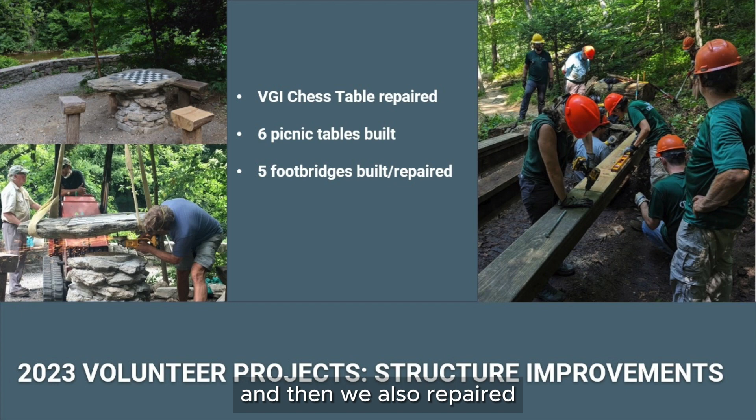Built 6 new picnic tables, 2 of which are in a new picnic area on Forbidden Drive by Jeanette Street. There's a planting there. If you haven't had a picnic, I have. You guys should go and enjoy it. It's beautiful.

And then we also repaired or completely rebuilt 5 footbridges in the park, which was no easy feat. Some of these were in the heat of summer in locations that we had to haul a lot of heavy material in. That was a partnership with our structures crew and crew leaders together.

And we also planted a whole lot, so over 1,000 native plants. About half of that are herbaceous, but among that, 246 trees, 209 shrubs.

Our 4 main areas that we focused on this year was continuing a riparian planting just north of the Red Covered Bridge next to Forbidden Drive. On the Yellow Trail uphill from Kitchens Lane, Harvey Street tract, we've been putting a lot of work. You'll hear more about that, but we've been continuing to restore the habitat in that area. And then along the fence line at Andorra Meadow, sort of building a natural screen to kind of block out some of the artificial light that has been popping up.

Engagement with our youth has always been really important to us. Since FOW's been around, we've always worked with school groups. Last year alone, we had 11 different school groups that came out to work on service projects in the park. But something that we've really been wanting to do beyond having that kind of one and done visit with students is to have returning students, recurring engagement.

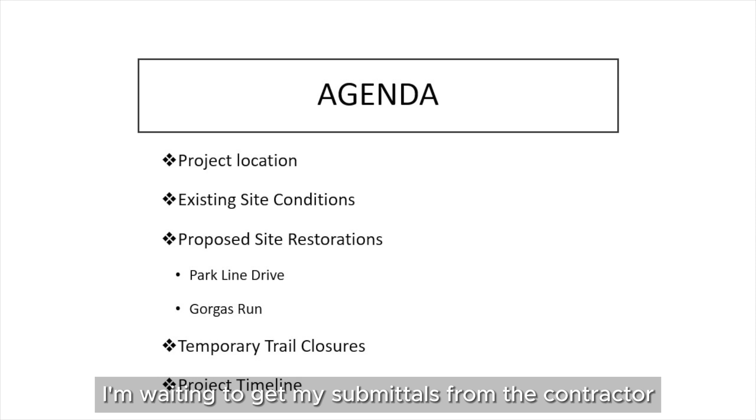So my group is an office that works on natural restoration projects, usually stream restoration and wetland restoration projects. They're usually based around where Water Department infrastructure assets are located - storm sewers, sanitary sewers, water mains, stuff like that. I'm just going to tell you guys about one project which should be getting started in the next few weeks. I'm waiting to get my submittals from the contractor. It's the Park Line Drive Interceptor and Gorgas Chute and Outfall project.

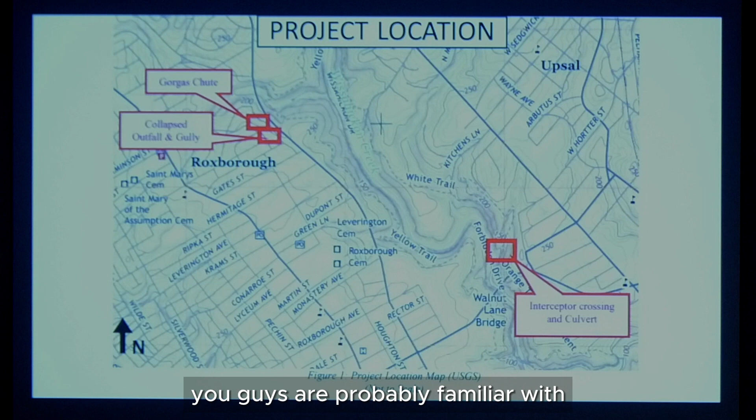Here's a map of the locations. So the Park Line Drive Interceptor crossing - you guys are probably familiar with the Toleration statue. If you take the trail down off of Park Line Drive, you'll get to a spot where there's a crossing that goes over the stream there. That's actually a sewer interceptor. There's a 5-foot diameter sanitary sewer that runs underneath that little pathway when you're walking across the stream. So that's one of the project sites.

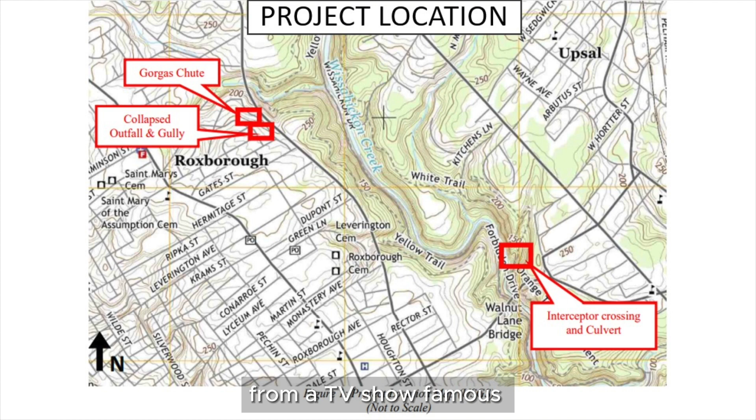I have more slides moving up, so I won't get into too much detail while we're looking at the map. The other 2 sites are located right next to each other, right off of Gorgas Lane. You come down Gorgas Lane and up the yellow trail a little bit. There's a stormwater outfall that drains a small part of Henry Avenue, and then there's another stormwater outfall that's apparently famous from a TV show - a stormwater chute. I don't know the show very well, Pauline was explaining it to me. Yeah, I've kind of heard a few things about that. So hopefully it looks familiar.

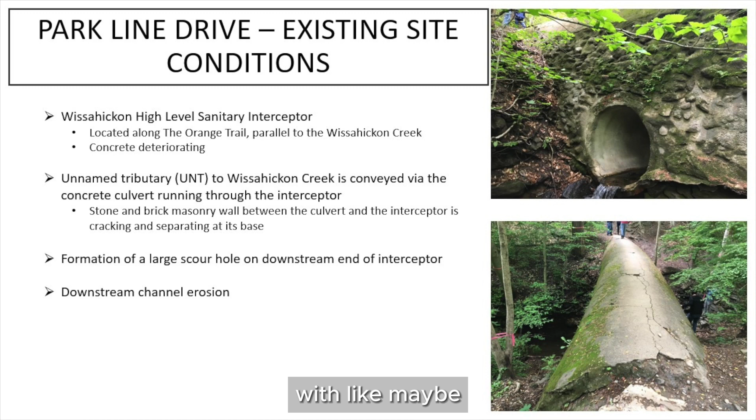But getting back into the Park Line Drive site first - this is what the infrastructure looks like right now. The pictures themselves might be a year old or so, but you can see the concrete on the interceptor crossing. It's a sanitary sewer, we call it an interceptor based on where it is and all the connecting sewers. So the trail here that goes across the top of that structure - the pipe is actually directly underneath your feet, with maybe a couple feet of concrete in between you and that, obviously.

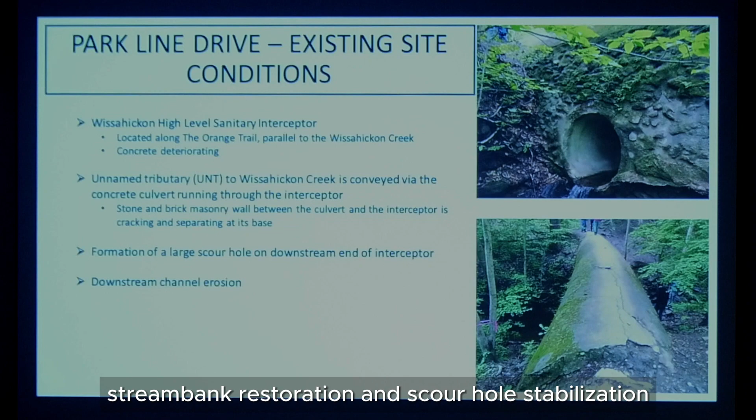In this picture, the sewer's up here, and this culvert is what allows the stream to flow through there. What you can see is that there had been some old repairs done, and the stream just continues to wear away on the stream bed below the structure. Any undermining like that isn't really good for the structure. What we're going to do is clean off the entire structure, repoint it with mortar, and then going downstream, we're looking at doing some stream bank restoration and scour hole stabilization - basically putting big rocks in the stream and augmenting that with some plantings, trees and grasses to keep everything stable. If you guys have any questions, I can answer them, or you can follow up with Pauline or Ruffian, and I can send you information.

I also have some summary sheets over here. I only brought 10, so I'm a little light on those - I didn't know there was going to be such a great crowd.

Rick, I have a question before you move on from the High Level Interceptor there - it's very difficult to walk across because it's rounded. Do we have any plans to flatten that out a little bit? No, unfortunately, no - you can't do that. It's just going to be the same thing that it is.

I'm going to show the trail diversions later too. We didn't see any need at the time - everybody's already using it, and it seems relatively safe. It doesn't seem like anybody's gotten in any trouble out there, so good on everybody for that one.

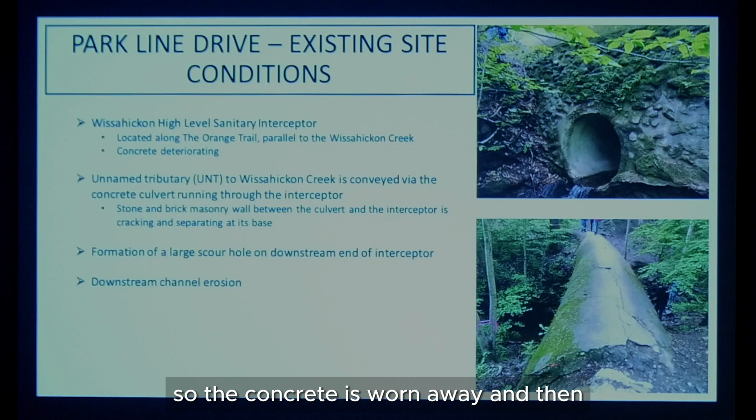So really just repairing the infrastructure - repairing all the concrete. You can see the crown of the sewer itself has become exposed, so the concrete is worn away, and then the cover wore away. Repairing the structure is the big deal there.

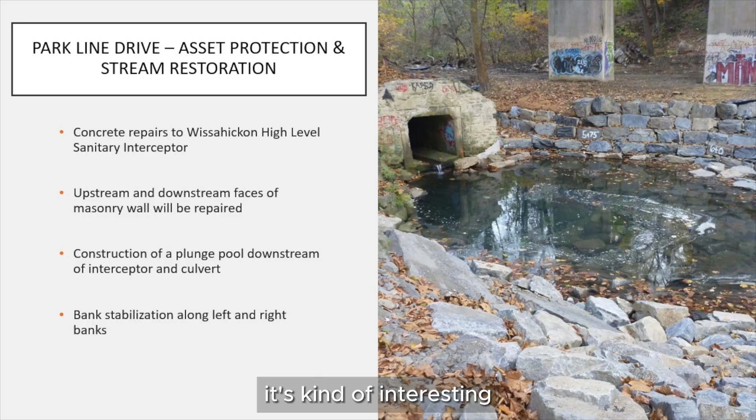Over at the Gorgas site now, this is a picture of the old scour hole in front of the outfall. That's not exactly what we're repairing here, but the big deal is the chute that stems from an outfall off of Fountain and Henry - there's actually two Henrys there, it's kind of interesting.

The chute is actually in bad shape. There's a lot of cracks and holes in it. A bunch of the segments are settling at different rates, so it's almost like shifting and morphing apart. The plan is to use a particular type of concrete to fill in all the holes and patch the whole thing up.

Then use a different kind of mortar for the grout between the segments, so it's a little more pliable and can fit in there without immediately cracking. Around the chute, we're going to do a lot of regrading and planting - we're going to try shade-tolerant plugs and grasses underneath the Henry Avenue Bridge. It'll be interesting to see how that goes, since it's pretty much barren under there right now - when you don't get a lot of light, you don't get a lot of vegetation.

So for the chute, why not replace it with basically a spreader kind of system? We had thought about doing stone steps, like stone weirs, coming down the hill. There were a couple of reasons why we didn't go with that.

Money being part of it, unfortunately, but really the biggest deal is the outfall is very high up on the hill and it's a relatively big one. When you get a lot of water flushing down the hill like this, it can easily start to tear apart structures like that.

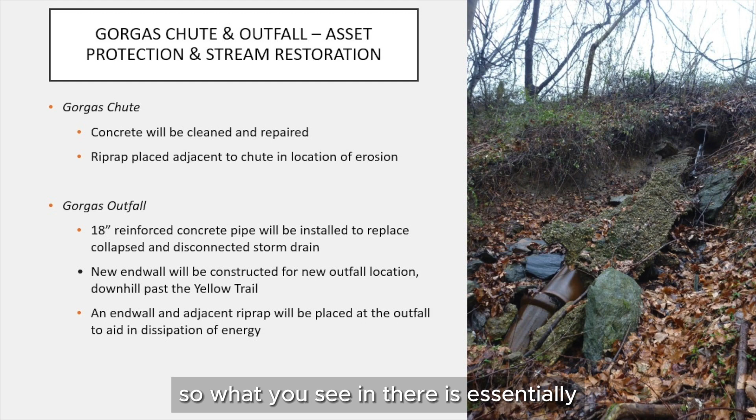This is the other site that's at Gorgas. This is the outfall off of Henry Avenue. As you can tell, what happened there is that the segments of the pipe started coming apart. As they did, the water started getting underneath them, scooping and eroding the dirt out from underneath them, and it eventually continued to collapse on itself.

So what you're seeing there is water, not immediately during a storm, but relatively close to when it had rained. Once this structure fell apart, the stormwater comes out, hits all this rock and concrete that's in the way, and completely blows out the banks and everything around it.

One of the issues with this, when we did the other project, the outfall was in decent shape, and then it actually started deteriorating during the project. We did a previous project at Gorgas and put a bunch of rock around the trail to make sure the yellow trail stayed stable with that stormwater coming down the hill.

So the plan now is to add a new manhole towards the top of the hill, and then we're going to have a series of manholes as we bring the water down through essentially a series of steps within the pipes. There'll be about 5 or 6 pipes connected to 5 manholes that bring the water down the slope and then discharge it through an outfall.

The key thing with this is getting the water off of Henry Avenue safely, not having it erode the stream and undercut trees out there. Unfortunately, a few big trees will have to come down in order for us to do this work.

But the other key is the stormwater now is going to be conveyed through this pipe underneath the yellow trail, so the trail won't be in jeopardy anymore and will be stable in perpetuity. From there, the outfall discharges onto a rock apron, and there's actually a big bedrock outcrop that it'll flow over, as it already does, down to the Gorgas Run.

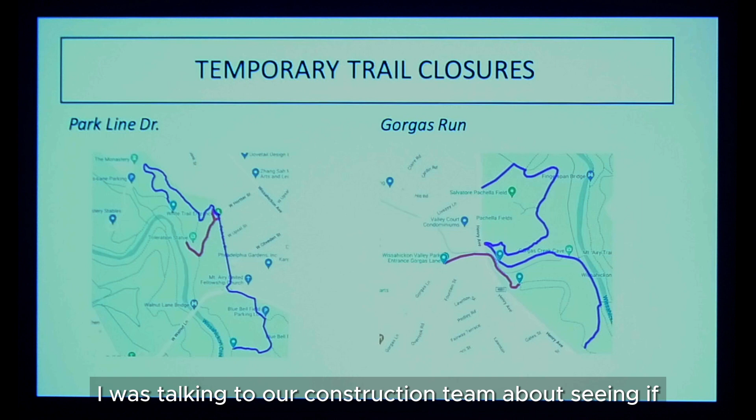I was talking to our construction team about seeing if, once we get equipment here, maybe we could do some staging and stockpiling here rather than over on the Gorgas Lane Trail. That way we could open this back up. But I can't promise that right now — I haven't spoken with the contractor, and we're still sorting everything out with the submittals.

So, I'm talking a lot, sorry. This is my stuff.

Construction is initiated — we had the pre-con meeting out in the field last week on Tuesday. Considering they don't have the submittals in yet, I'm thinking it's probably going to be more like late February when they get started.

From what I've heard from the construction team, they're going to start at the Gorgas site first, even though I started at the Parkline site, which is just the way I've been doing that mentally for 3 years. They'll start at Gorgas and then move on to Parkline. The contractor who won the bid actually did the Gorgas site previously, so they're very familiar with the site and the interaction of trail patrons there. I think that should work out well, and I'm really looking forward to it getting started.

The construction stuff in the field is kind of my favorite thing to be involved in. So, thank you.

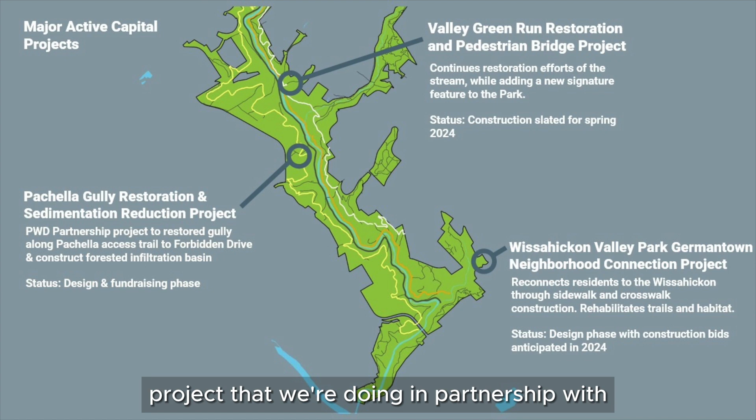So these are the 3 projects we'll be diving into with you. Starting with the Wissahickon Valley Park Germantown Neighborhood Connection project, I'll provide some updates, as well as introducing our Pachella Gully project that we're doing in partnership with the Water Department. Then I'll turn it over to Ruffian to provide updates about the Valley Green Run project.

But before that, I wanted to share the exciting new kiosks that went into the park last year. This is part of our wayfinding and signage plan implemented in 2016, which saw the installation of over 25 kiosks throughout the park, as well as wayfinding posts, providing a formal way for visitors to interact with and understand how they get around the park. The tertiary, or single panel, kiosks you see here had been identified in the plan to be installed, and as funding became available last year, we were able to put them in.

That includes Cathedral Road, which is by Courtesy Stable, Sumac Street down in the southern end of the park, as well as Harvey Street, which is in connection with our capital project there, and then Rittenhouse Street across the street from Saylor Grove.

I also have some status updates to share about projects that are still in the planning and design phase, that we're doing a lot of work behind the scenes throughout the year, though the public may not see that until next year.

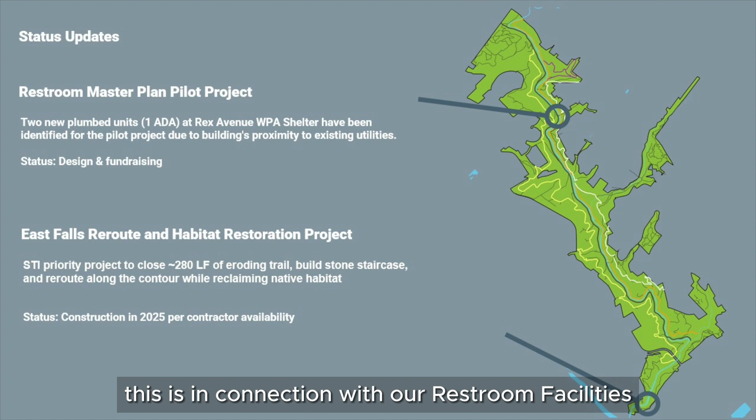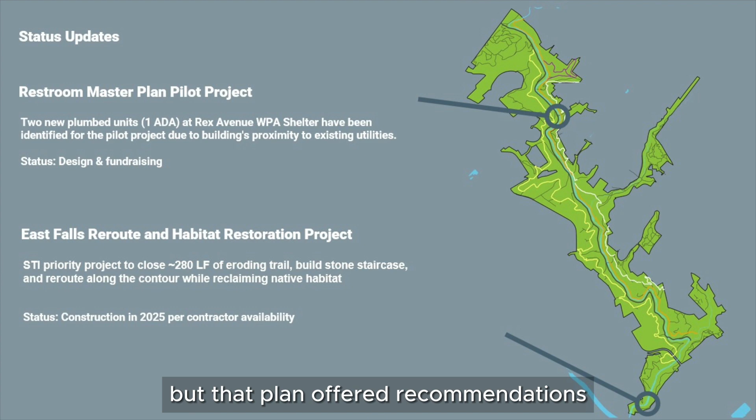The first is the Restroom Master Plan pilot project, in connection with our Restroom Facilities Master Plan, which we completed last year. That plan offered recommendations for a number of facilities throughout the park. The Rex Avenue WPA shelter was identified for the pilot project because of its location in a high visitation area, as well as its proximity to utilities such as sewer and water. Over the next year, we'll be developing plans and designs for that.

Our East Falls Reroute and Habitat Restoration Project is an STI priority project to close 280 linear feet of trail, with a 320 linear foot reroute, as well as construction of stone steps that will retain the hillside that's been eroding, and restore access that's been compromised due to the hillside and its steepness by Gypsy Lane. Our contractor is available in 2025, so that's when that work will take place, as a hybrid style project with our staff and volunteers.

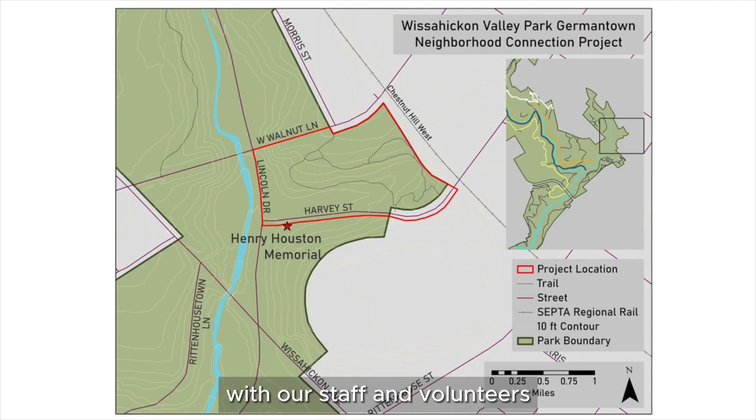Diving into our more active capital projects, our Germantown Neighborhood Connection project looks at the trails, sidewalk and crosswalk. A summary of the project is to improve the parkland that's there. There had been trails, but getting in there and making sure they're sustainable and able to be traversed easily, improving the native habitat, and amenities such as this footbridge put in by our structures crew last year, the kiosk you saw in the previous slides, as well as wayfinding posts. And of course, a big component of this project is to build a sidewalk and crosswalk.

This project is funded by the Department of Conservation and Natural Resources. We have money from Councilwoman Cindy Bass of the 8th District, the National Recreation and Park Association through their corporate sponsors Sensodyne, the Clean Air Council, the Garden Club of Philadelphia, and we're also excited to share that we were recently awarded a grant from the Department of Community and Economic Development through their Philadelphia Local Share Account Grant Program, which has helped us close the gap in funding for construction of the sidewalk and crosswalk.

So what we did last year was a lot. We planted just under 600 herbaceous flowering plants, as well as 130 trees and shrubs. These are all native plants that either serve to restore a canopy gap in the project area, or general beautification or restoration of the understory in that area.

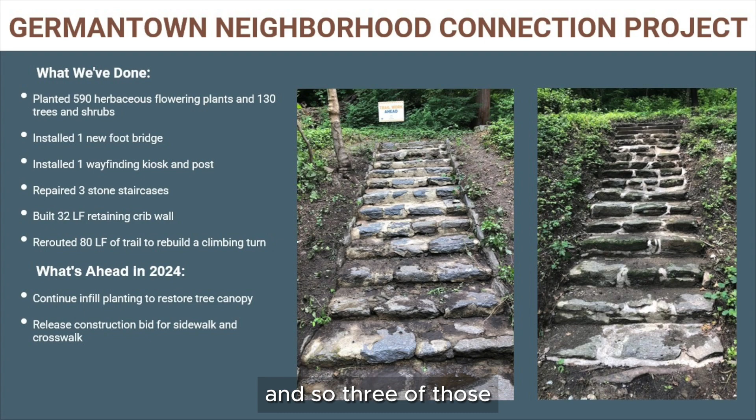A lot of trail work got done, as Shawn alluded to before, with the construction of a retaining crib wall, and then a trail reroute to rebuild a climbing turn, which is the most sustainable way to address a change in elevation along the trails. This year we'll continue with habitat restoration, and we'll also be releasing a construction bid for the sidewalk and crosswalk.

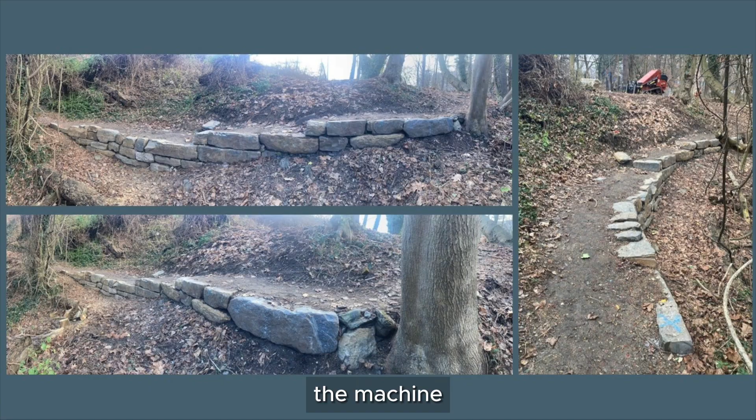Here's a photo of the retaining wall. This was all built by hand; the machine did some of the moving of the rocks. There should be applause for that. Look how beautiful it is. It was a lot of work, it took us some months, sweat, tears, no blood, I don't think. But...

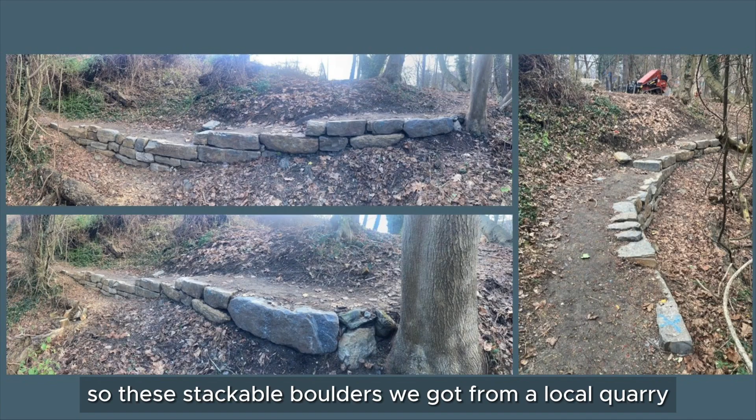These stackable boulders we got from a local quarry, and then built it, and then capped it with mineral soil to restore the natural trail tread that you're familiar with in the rest of the park.

Here I wanted to provide additional detail of what you might expect from the new sidewalk. It's split into 2 screens because Harvey Street is so long, but right over there is where our kiosk is.

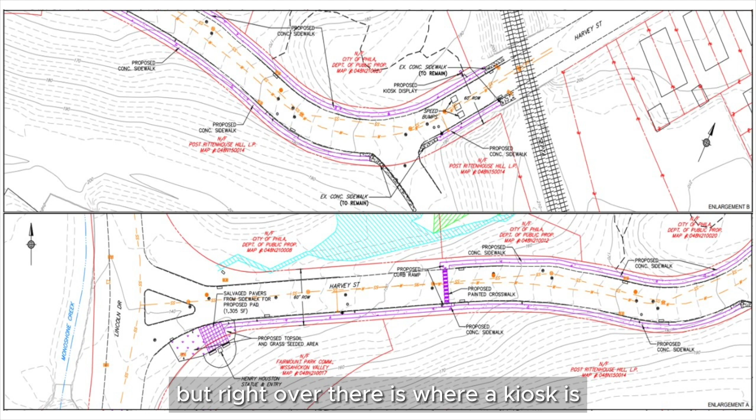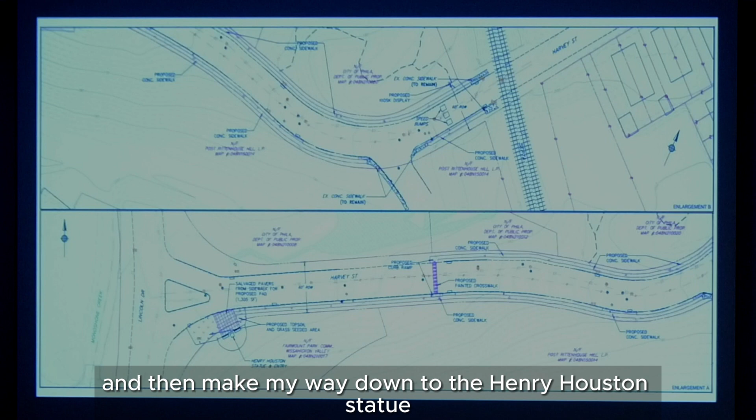So if I were to exit the trail, I could walk down the street, continue this way, even cross the street, and make my way down to the Henry Houston statue, enjoying the surroundings and watching the cars go by. I wanted to close up a little bit on the crosswalk.

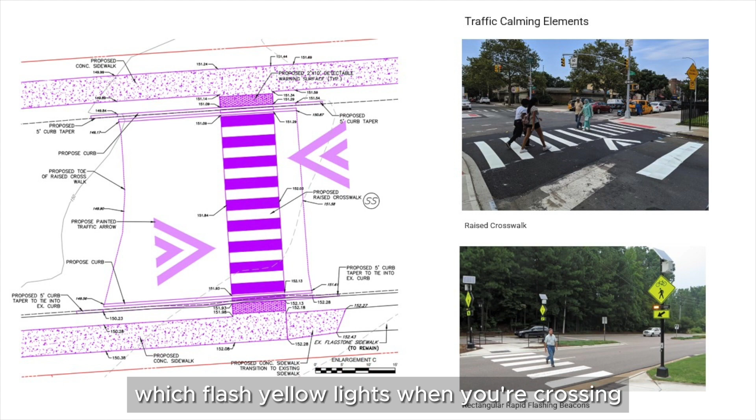This is a new feature that doesn't currently exist. There are sidewalks at Harvey Street, but they are crumbly, so we're fixing those. We also wanted to add this crosswalk to provide safe passage for pedestrians across the street. In compliance with Philadelphia Streets guidelines, we have traffic calming elements to improve safety, including a raised crosswalk and rectangular rapid flashing beacons, which flash yellow lights when you're crossing so everyone knows you're doing it.

Moving on to our Pachella Gully Restoration and Sedimentation Reduction Project. This looks at the trail that goes from the upper neighborhoods in Roxborough down to Forbidden Drive behind Pachella Fields. There have been years of erosion and stormwater, and you may have seen this worsening gully, which is not only an imposition for park visitors going through the park, but also creates access issues for our municipal partners trying to get through, as well as for the water infrastructure underneath.

Working with the water department, who is almost finished with design with their consultant, we are going to build a forested infiltration basin at the top of the hill, as well as a series of rock armored ditches and channels to help get the water down the hill in a way that doesn't damage the trail or carry additional sediment down to the creek.

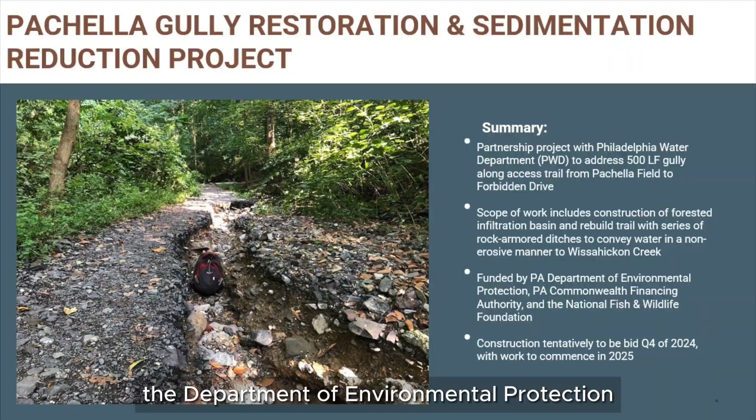This project is funded by the Department of Environmental Protection, the Commonwealth Financing Authority, as well as a grant from the National Fish and Wildlife Foundation. Currently our schedule is to potentially bid out construction toward the end of this year, with work to start next year. I also have some renderings to give you an idea of what that work will look like.

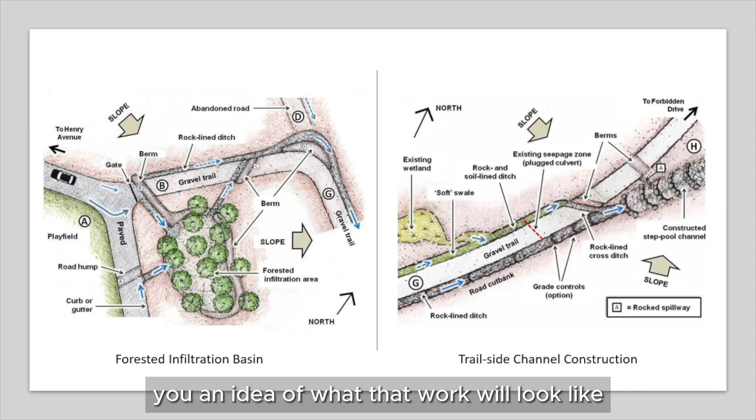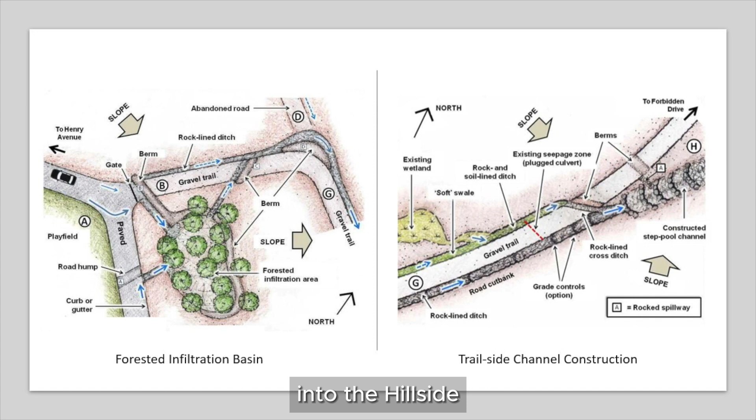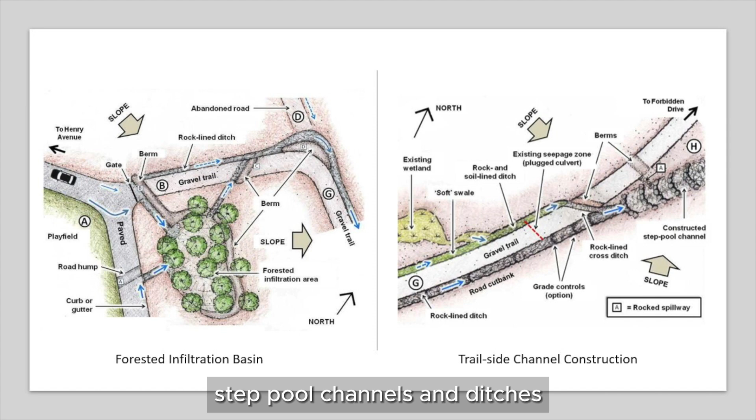On the left is the forested infiltration basin, designed to catch as much stormwater as possible coming from the surrounding area, and collect and infiltrate it into the hillside. For the water that's left over and continues to make its way down toward the creek, a series of step pool channels and ditches allow the water to go down in a way that doesn't damage the trail.

And that's all I got. I'll turn it over to Ruffian to give you some updates on our Valley Green Run project.

Thanks, Pauline. That was a lot. But here we are. I'm having a hard time—I want to look there. I've got to put my glasses on to see that.

Our Valley Green Run Restoration and Pedestrian Bridge Project—this is the year, we're doing it. I'm happy to report that the very first work item happened, which was preparing the site for utilities to move from one side of the road to the other. So it's very exciting. We hope to be breaking ground in the spring.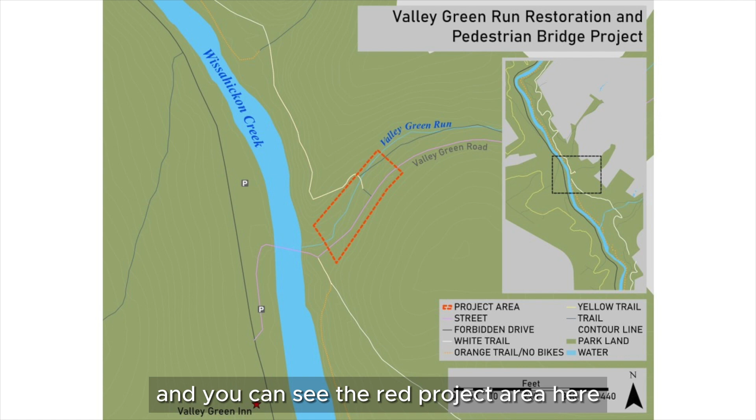We're targeting late March. You can see the red project area here. I know some of you have seen this image before, and many of you have heard my talk either at this meeting or at my other road shows for this project. But you can see the rendering here, the 3D rendering, and the conditions on the site.

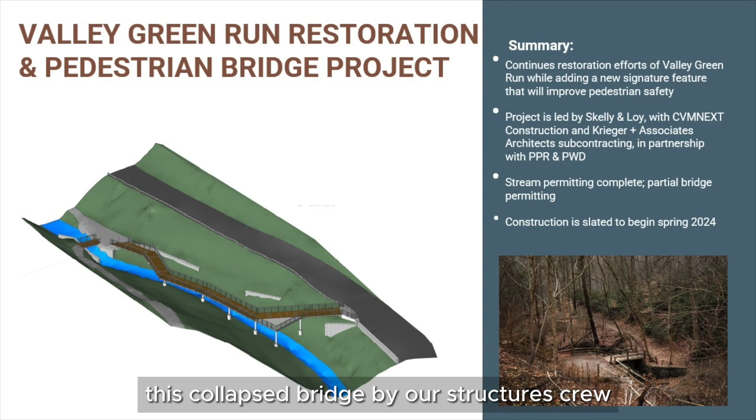The bridge was built, I believe, in 2004 by our structures crew to keep access along the trail down from the upper lot at Valley Green, going all the way down to the stone bridge. In 2004, the trail went that whole length. There were some very large storms that year that wiped out the bank and the trail, and the structures crew built—I don't know, many of you probably remember it.

I thought it was the most wonderful little bridge. It looked very rickety, but it was solid. Unfortunately, the bank it was built on was not, and after 10 good years of service, it collapsed. That was 2014. In 2015, we were awarded the first grant for this project, so it's been on the list for a long time.

The stream work will be the first phase, happening in March. That will continue the restoration that happened in 2013.

So if you see the upper lot with the boulder step pools there—if you've been around as long or longer than me, you remember the fun of the upper lot where it was crumbling into the stream, and perhaps your car would go with it at some point. Certainly many parking curbs went over the edge through the years.

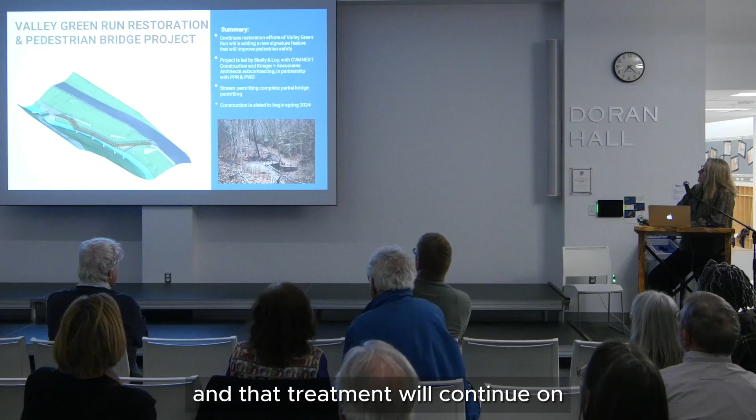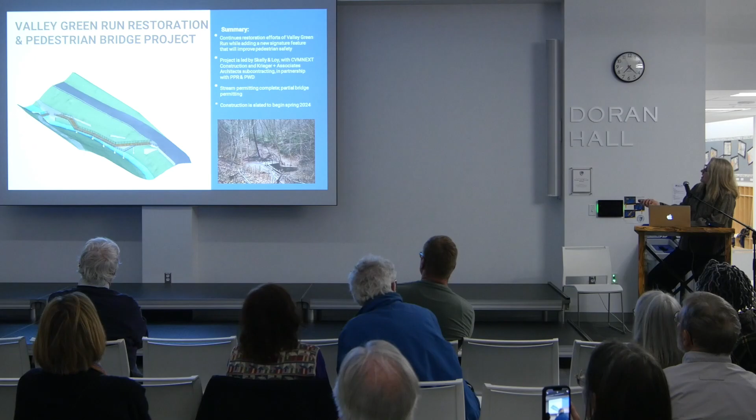So, what have we done? We've got this thing permitted, which was a huge hurdle. And we will be doing construction in the spring, as I said. Not only will the larger bridge go in, but there will be a new smaller bridge crossing the way. The two will be of the same materials. Luckily, the little bridge does not require concrete piers—it can just be built crossing the span. And we're fully permitted.

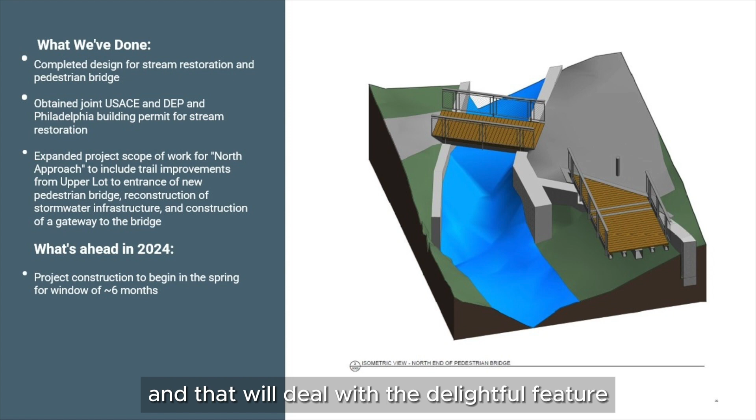And we have added some additional features to the project with additional funding. You'll see this north approach here, and that will deal with the delightful feature—it seems funny to say, do you know this storm drain? But I think you probably do. It's a funny little grate that's above, not below, and there's a pipe that comes out that shoots the water into it. So we're working to get that a little neater in the area so that it's not in the trail.

So the big thing, this is the big thing we're going to do this year: we're going to build this bridge. We're going to break ground. We're going to build it, and we're going to love it.

Unfortunately, to get our bridge, there is going to be a disruption to access, and so the road is going to be closed. When construction begins in March, there will be no vehicle access from Valley Green Road into the park, and the trail access—the X's tell you where you can't go, unfortunately. This is because we will have cranes and large loaders and big piles of rock and lots of vehicles in and out, so the road will be closed.

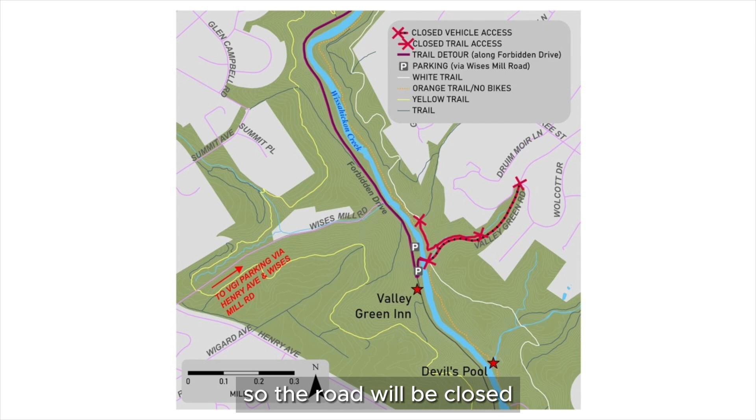But then it'll be a minor blip. It'll be behind us, and we're going to love our bridge.

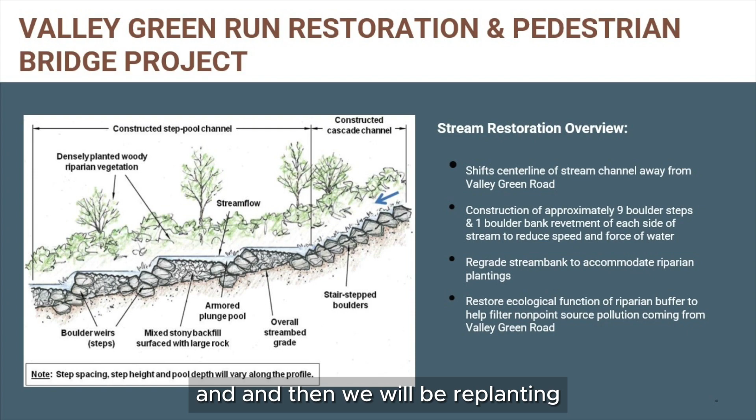And then we will be replanting. There's some kind of nice little bits of rhododendron in this area. There's some trees that are hitting the end of their lifeline, so there will be some tree removal that has to happen, but there will be restoration along the way.

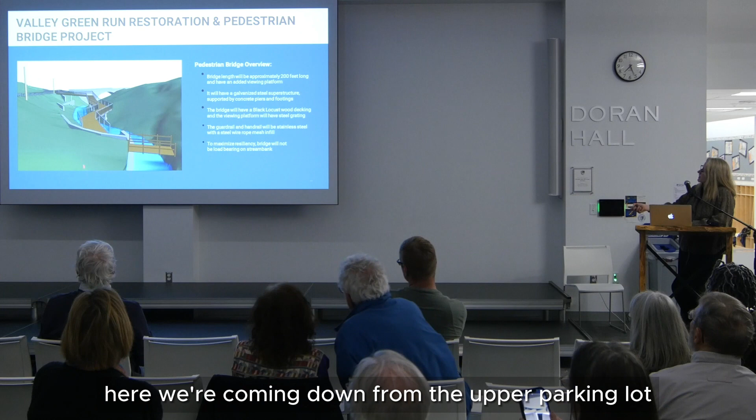And hopefully that will improve the riparian buffer. These boulder step pools really work, most of the time, to catch the water, let it infiltrate, settle, slow down, and during those really, really high events, those big stones stay in place and convey that water down to the creek. Here we're coming down from the upper parking lot, and we're crossing, we're going along.

We come out just above the stone bridge. These poles, they're going to move. And the reason why they're moving is the bridge will come in and need to be set into place with a crane, and the wires are in the way.

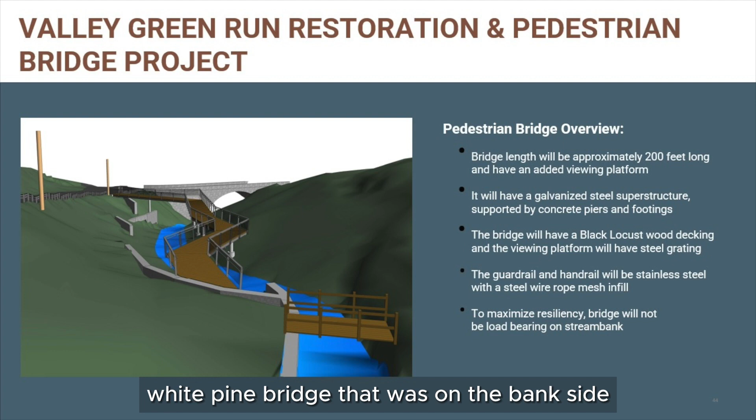So, got some facts here about it. We're pretty long—actually, almost twice as long as what we had originally spec'd out when we first bid out the project. We've gone through several iterations, the White Pine Bridge that was on the bank side, on the road side.

Really the committee that's involved with this—our partners at the water department, staff, and our consultants—really started thinking hard about how we really want to build for resiliency. If a tree falls on it, if water flows over it, if someone—not everybody loves the things we put in the Wissahickon—so it's built to withstand any sort of damage, weather or human-related, and that it is possible to be repairable. So nothing too custom or unique that was specialty forged in Liechtenstein.

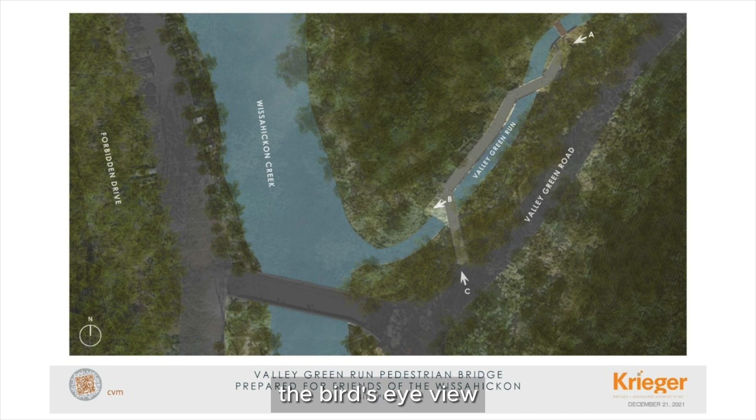Here we have the bird's eye view, looking at coming into the bridge. Again, this is what we're calling the north approach area.

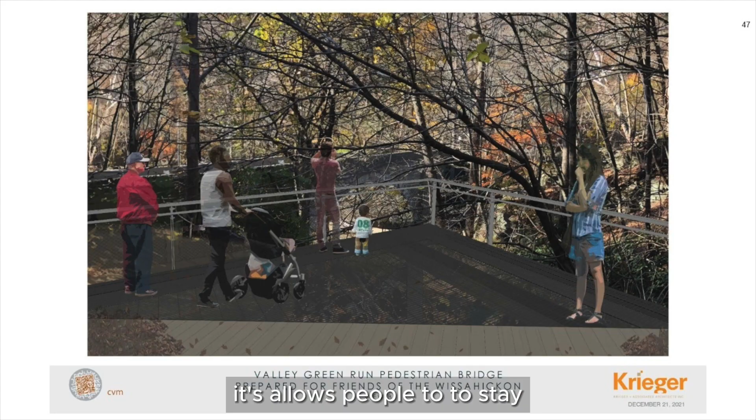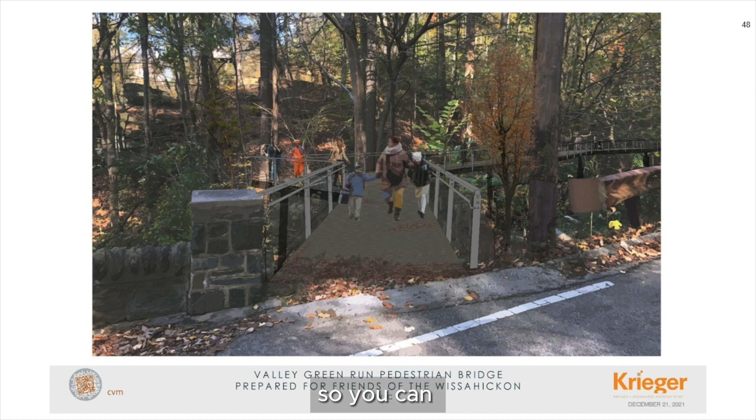The viewing deck will get wider as you come out, so if you want to stay and linger and gaze upon our beautiful stone bridge and the amazing rocky outcropping across the way, it allows people to stay. This section will have see-through grating so you can look down and see what's underneath. The netting on the side will be the same exact netting as they have here inside.

In this north approach area, of course, all of these things take resources. So many people, companies, state agencies, and private foundations have contributed, and there will be a beautiful commemoration of those investments. Space is still available - we have stones, we have planks, we have a grid. This is also available on the website.